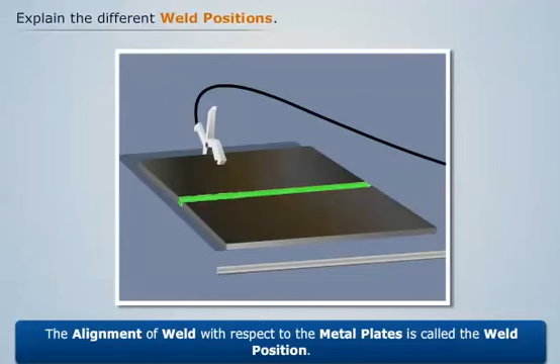We've seen that in the welding process, the weld is produced between the metal plates and its alignment is relative to the metal plates. The alignment of weld with respect to the metal plates is called the weld position. The weld positions can be flat, horizontal, vertical, or overhead.

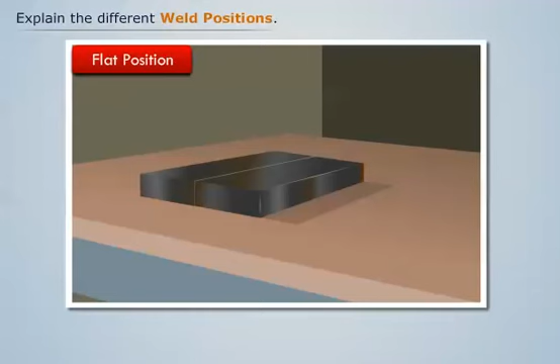Let's first discuss how to produce a weld whose alignment is flat. First, place the two metal plates in such a way that their upper faces lie in the horizontal plane. Now bring the welding torch and filler rod and start the welding process between the edges of the plates.

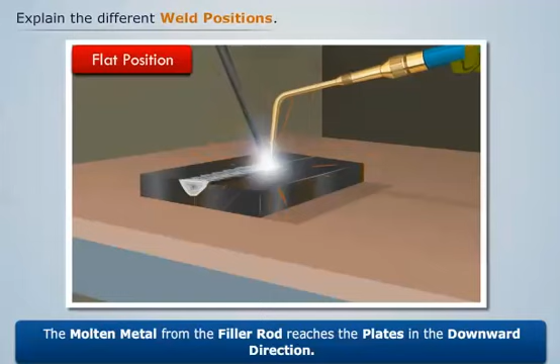We see that the molten metal from the filler rod reaches the plates in the downward direction, and finally a weld bead is formed whose axis lies in the horizontal plane. Thus we have a weld bead whose alignment is flat. Another example of flat weld position is...

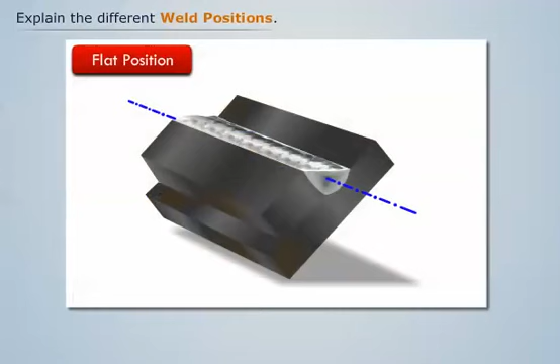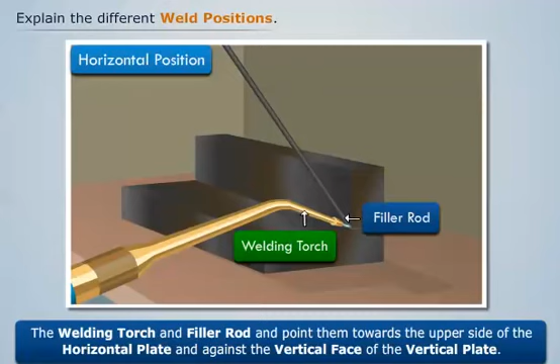Now let us discuss how to produce a weld whose alignment is horizontal. First, place the two metal plates at right angle to each other. Then bring the welding torch and filler rod and point them towards the upper side of the horizontal plate and against the vertical face of the vertical plate. Now start the welding process from the right end, proceeding towards the left.

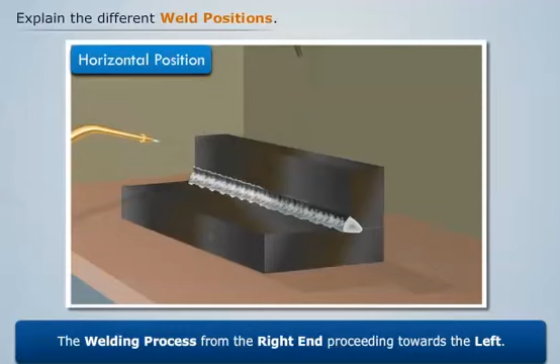We see that the weld bead is formed whose axis lies in the horizontal plane. Thus we have a weld bead whose alignment is horizontal. Another example of horizontal weld position is...

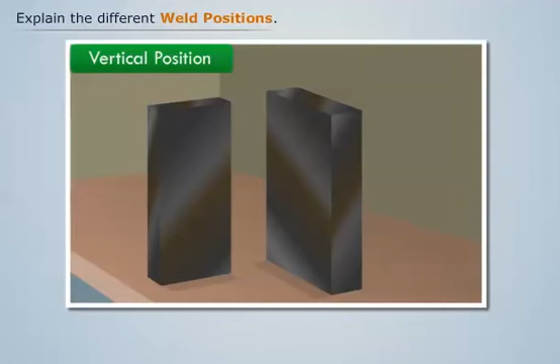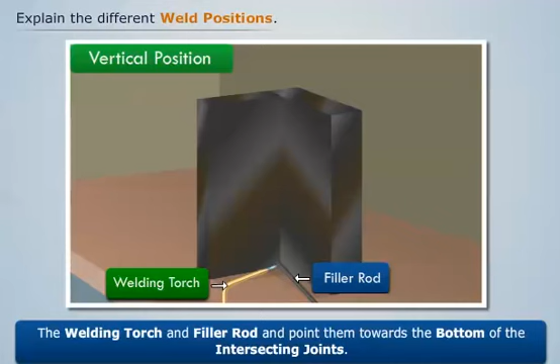Now let's discuss how to produce a weld whose alignment is vertical. First, place the two metal plates vertically straight, with their edges touching each other. Then bring the welding torch and filler rod and point them towards the bottom of the intersecting joints. Now start the welding process by moving upwards.

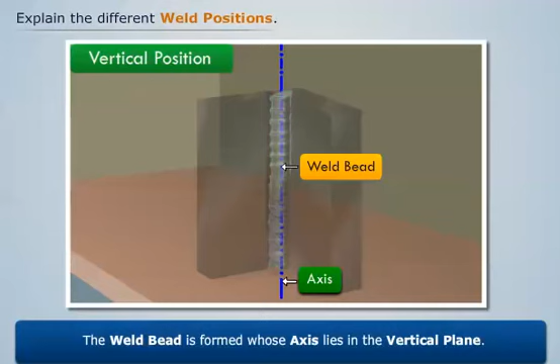After the welding process is over, we see that the weld bead is formed whose axis lies in the vertical plane. Thus we have a weld bead whose alignment is vertical. Another example of vertical weld position is...

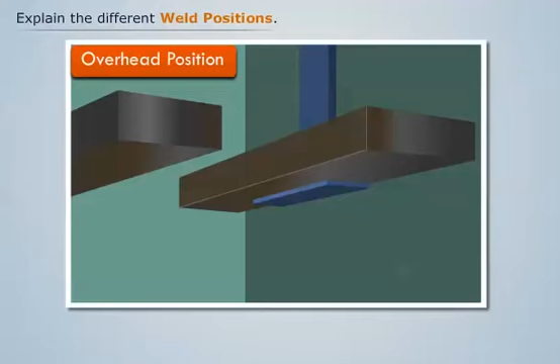Now let's discuss how to produce a weld whose alignment is overhead. First, place the two metal plates above the head of the welder. Then bring the welding torch and filler rod and point them towards the end, where their edges touch each other. Now start the welding process, proceeding towards the other end.

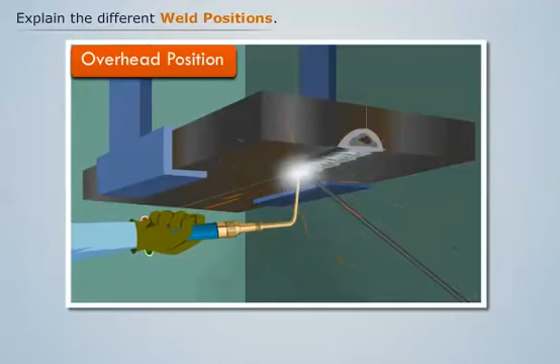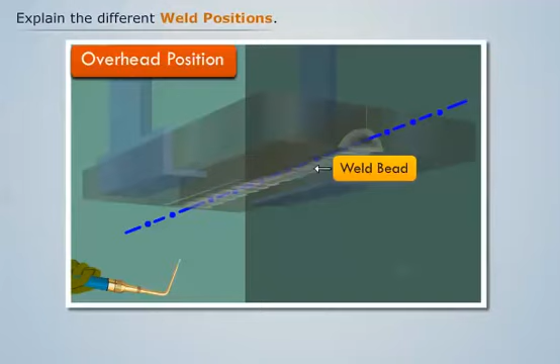We see that a weld bead is formed whose axis lies in the horizontal plane, but is placed above the welder's head. Thus we have a weld bead whose alignment is overhead. Another example of overhead weld position is...

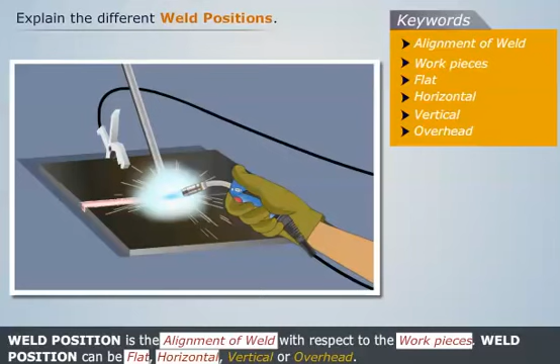Thus we can say that weld position is the alignment of weld with respect to the work pieces, and it can be flat, horizontal, vertical, or overhead. Related terms are...